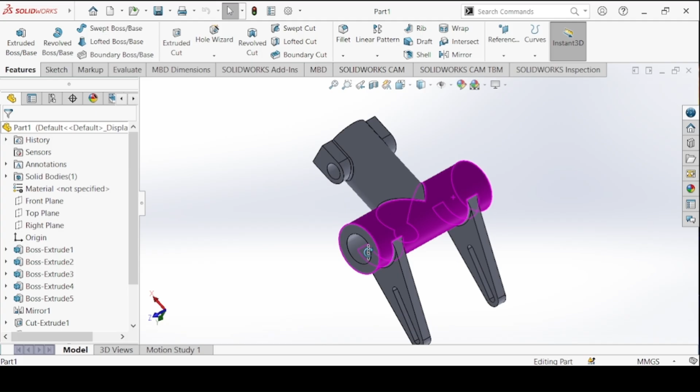With these dimensions on the top view, the front view, and the right side view, with all the dimensions in millimeters and the unspecified fillets having a radius of 2 millimeters. So this is a very easy part to model.

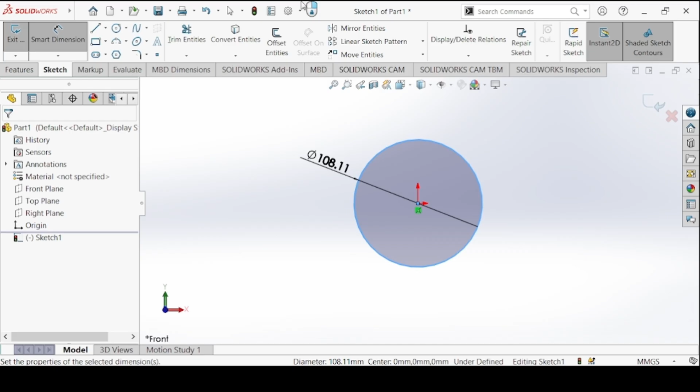Now extruded boss base, and then a length of 150. But looking at the part itself, you can see there is an absolute center here. So we want to make the extrusion via the mid plane. Okay.

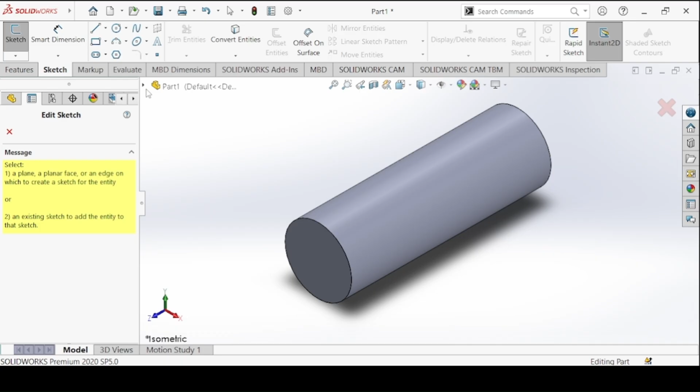We move on to this attached cylinder, and looking at the front view, the cylinder has a length of 100 millimeters starting from this middle, and the diameter of the cylinder is 50 millimeters. So create a sketch on the side view or the right plane. So the circle should be in the middle here, also having a diameter of 50.

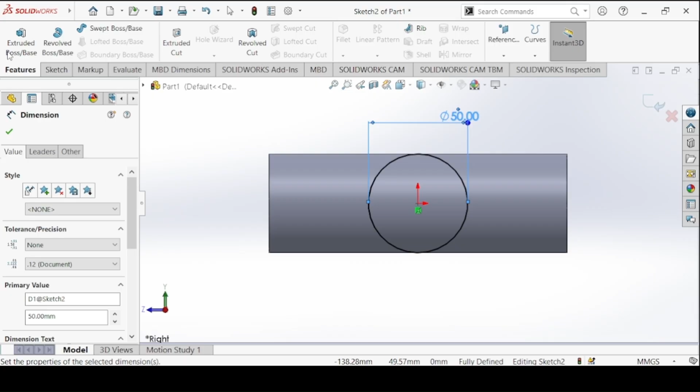And now extruded boss base should have a length of 100. Make sure you check this box for merge result to combine the two cylinders into one. Okay.

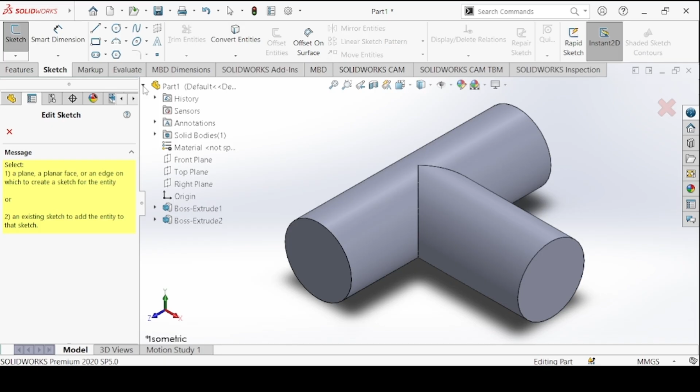Next, we add this material on the cylinder. We can see this is a semi-oblong feature. So create a sketch. Now, create a sketch in the middle and then extrude via the mid plane to both sides. So the sketch should be on the front plane, and then we use the straight slot feature to draw the oblong feature.

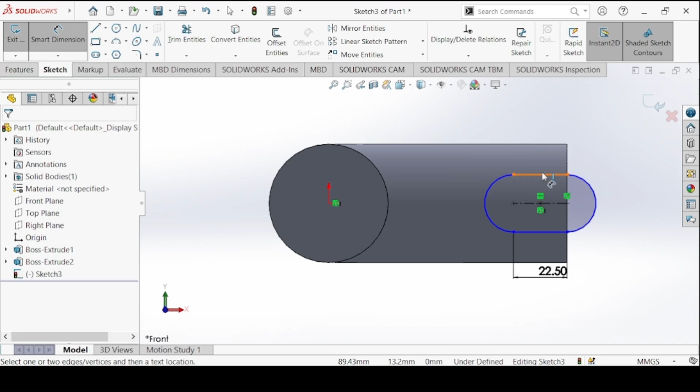Okay. Now let's dimension. So this length is 25. This is 22.5. We use a line to cut this shape because this will be the area that we extrude, and this will be it.

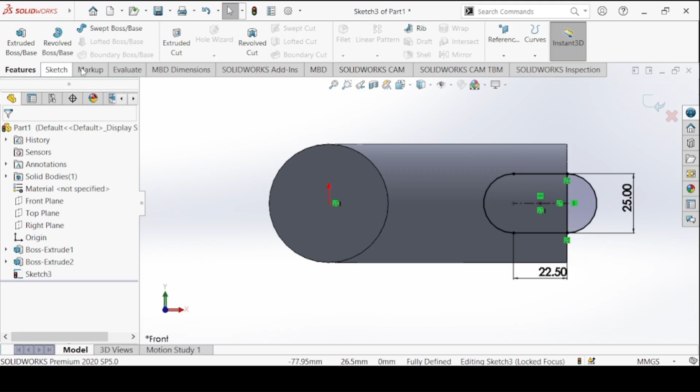So extruded boss base, and I'll click on this area, direction 1, mid plane, and then the length of extrusion is 70 millimeters. Merge results again to join the two blocks. Okay.

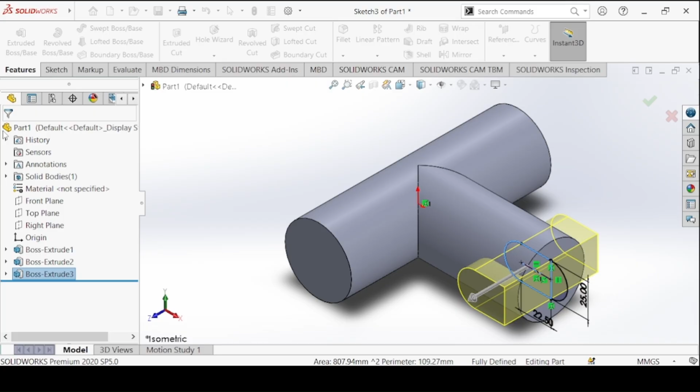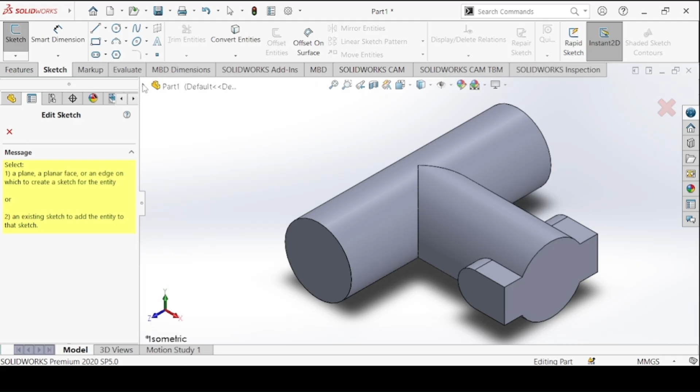Next off, we add the cylinder on top here. The cylinder has the sketch on the top plane, and the diameter of the circle is 20. And looking at this right view, the length of the cylinder is 35 from the middle here. Again, sketch this time on the top plane. In the middle here, a circle of diameter 20.

Extrude boss base and a height of 35. Merge results and okay.

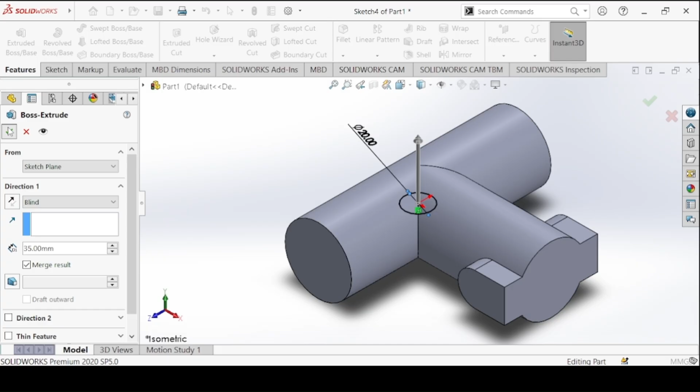The remaining material to add will be these two features. Looking here, we can see that they both have a thickness of 10 and they are both at a distance of 20 from these edges, so we can conclude that they are exact mirror images of each other. So we draw just one and then mirror onto the other side.

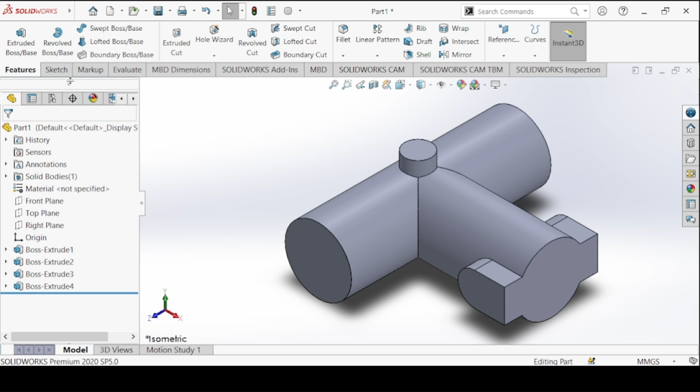So create a sketch on this face, and now let's draw one. So you have this center line inclined at an angle of 30 with an inclined length of 100. So draw that line for construction.

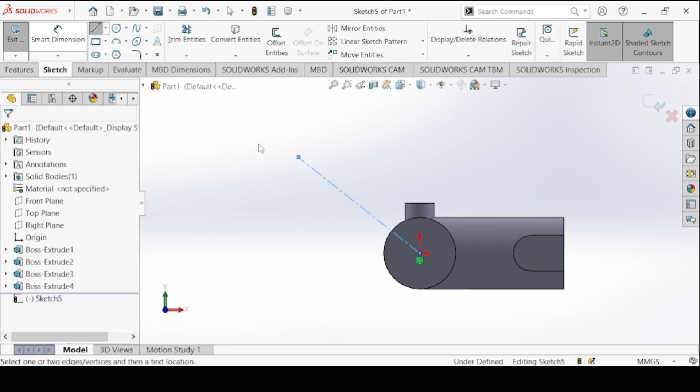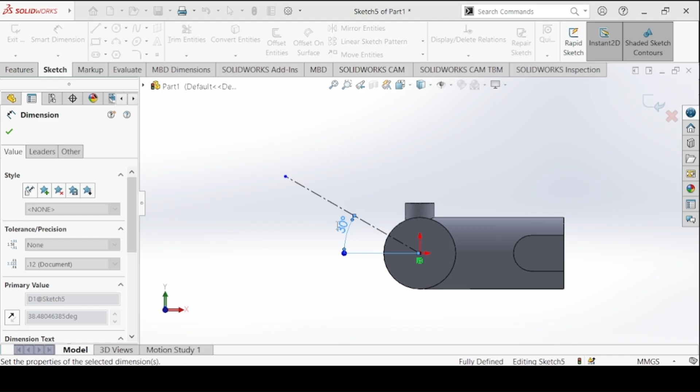Now let's dimension this line and then click on this origin again. You can see 4 cardinal points. Click on this arrow and the inclined angle is 30. Now the inclined length itself is 100.

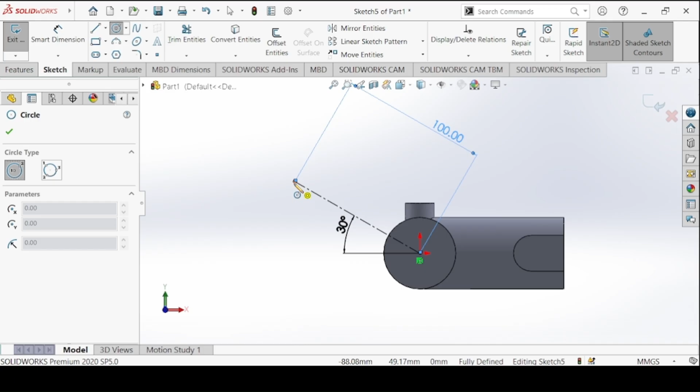And now over here we have an arc of radius 8. So instead we draw a circle of diameter 8 times 2. That will be the same thing.

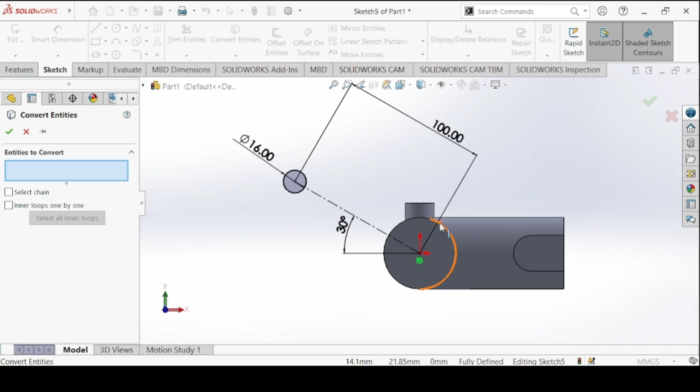And now we join the edges of this circle to the bigger circle over here. So first convert entities and then convert this circle into the sketch instead of drawing it manually, and then use the line to connect these two circles.

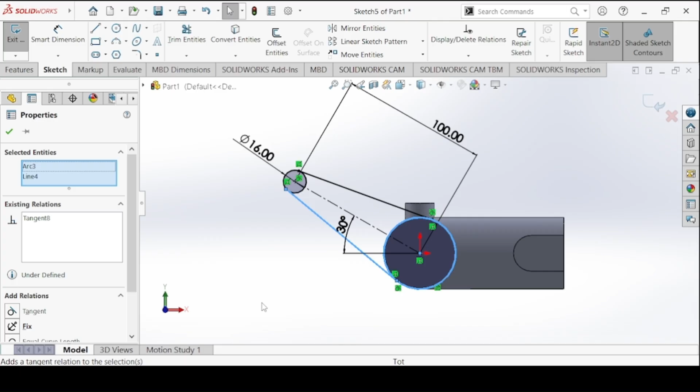Make sure that there are tangent relations where the line meets the circle. So you can see they are here, but over here it's not. So hold the shift key, click on the line and the circle and make tangent. Again, hold shift key, click on the line and the circle, make tangent.

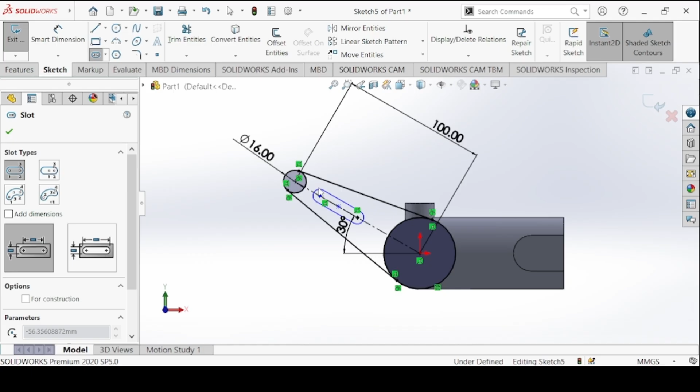Inside it we have an oblong feature of length 50 and radius of 3.5. So with a straight slot again, draw the oblong feature here, make the length, which is the inclined length, 50. And the radius itself 3.5.

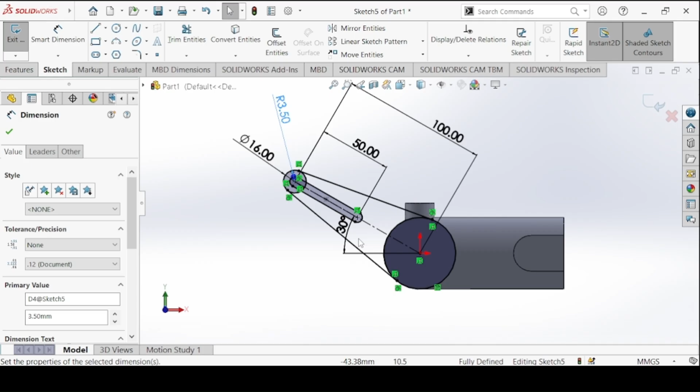Now we trim the unwanted edges so that this is all we have to extrude. So now extruded boss base, reverse for it to come.

I see the feature is offset by a distance of 20 from this edge, and the thickness is 10. So make the direction 10 millimeters, and then come to the from option here. Offset of 20 millimeters will do. Reverse for it to come inside, and this is what we want. Merge result and okay.

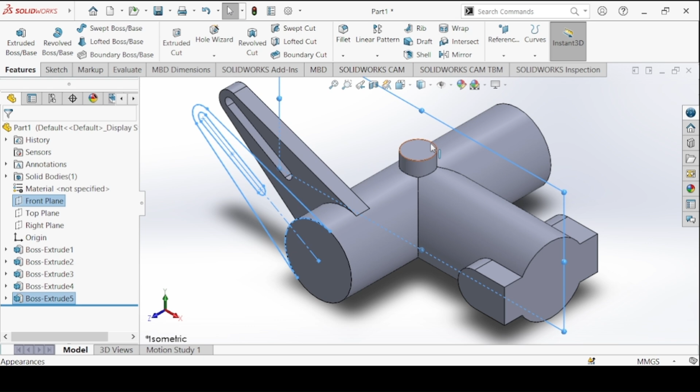The sketch is still selected. Hold the control key, and then we select the front plane, which will be the mirror plane. Click on mirror. Okay.

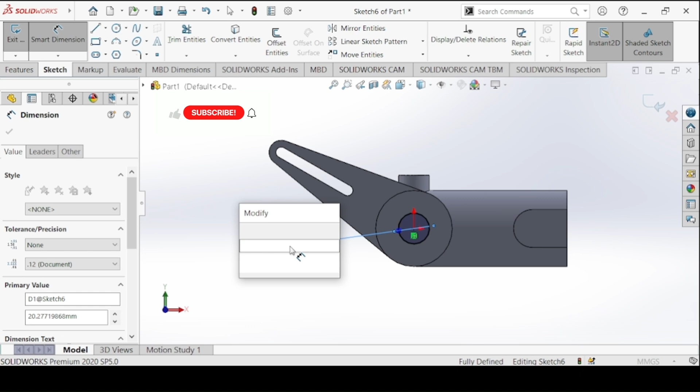We move on to create this hole. So a diameter of 30. Extrude cut on this face. I'll get a circle of diameter 30. Exit the sketch, and the length of the cut through all. Okay.

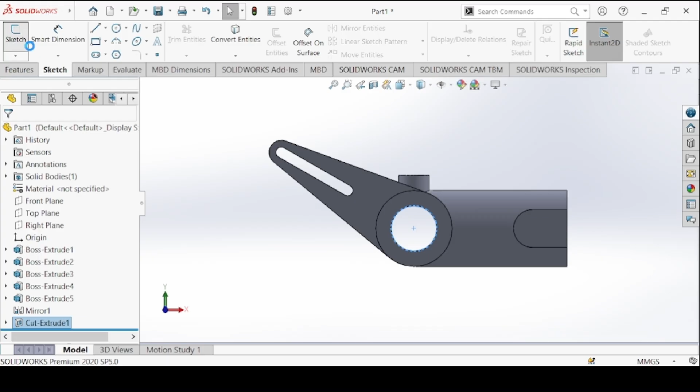Now a sketch on this face. This circle has a diameter of 16. Extruded cut, and then length of the cut through all. Okay.

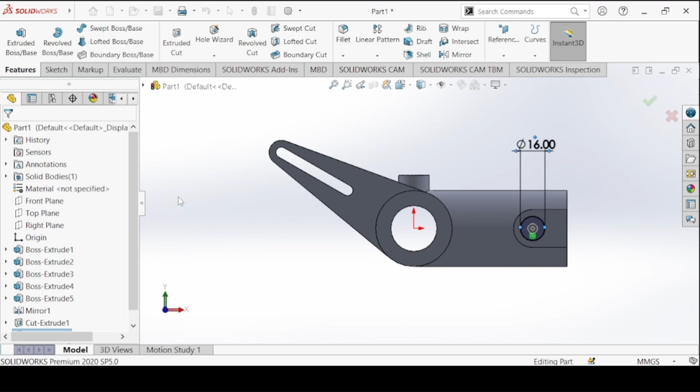There is another cut here, so extruded cut on this face, diameter of 10. Then set the end condition to up to next. Okay.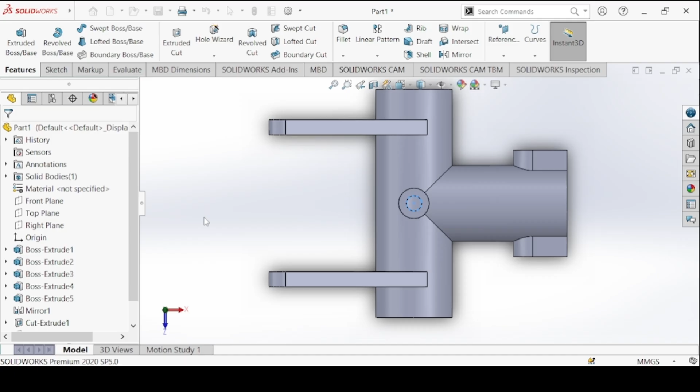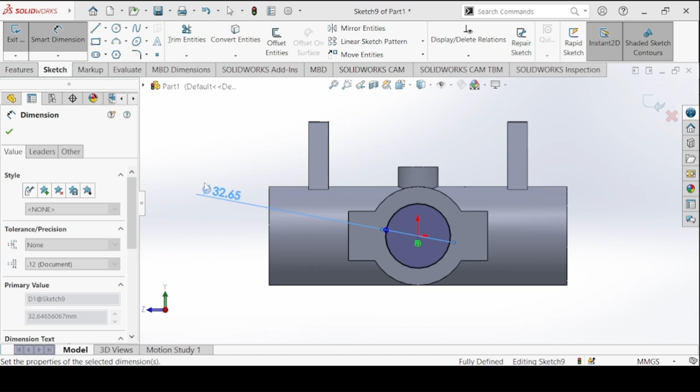Final hole will be on this face. Again, extruded cut, and then click on the face. Another circle, this time a diameter of 30. And then end condition of up to next. Okay.

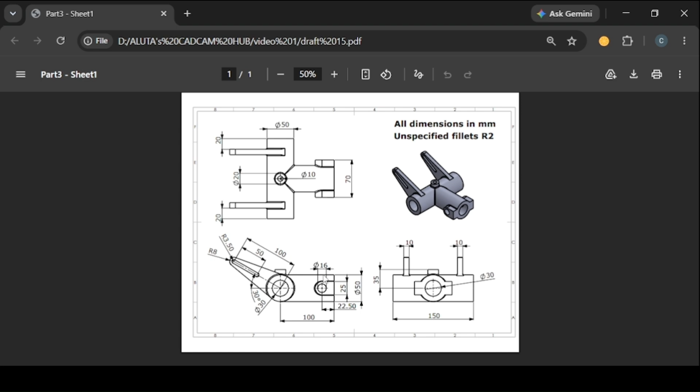The final thing is to add the unspecified fillet of radius 2 to all the edges that are supposed to have fillets. So click on the fillet feature, a constant size fillet, a symmetrical one of radius 2, and then click on all the edges that are supposed to get the fillet.

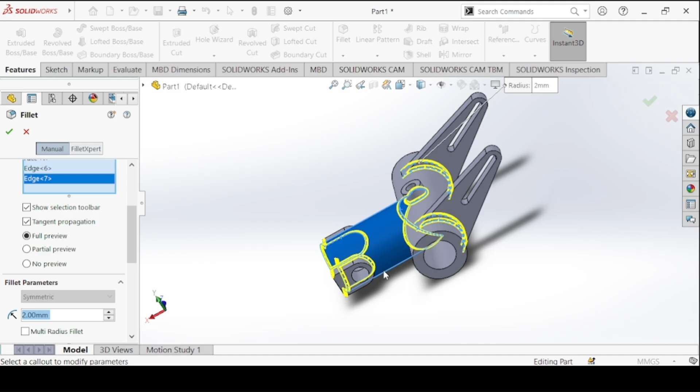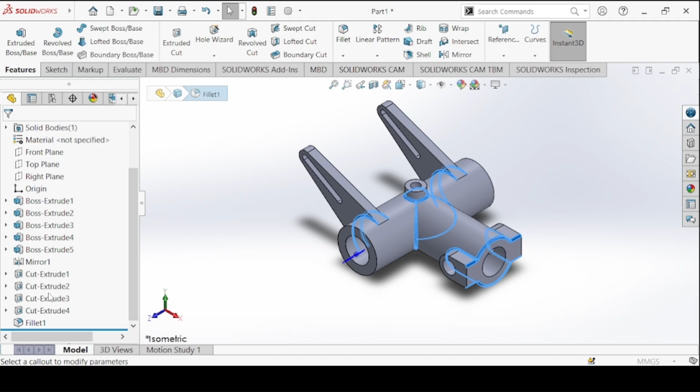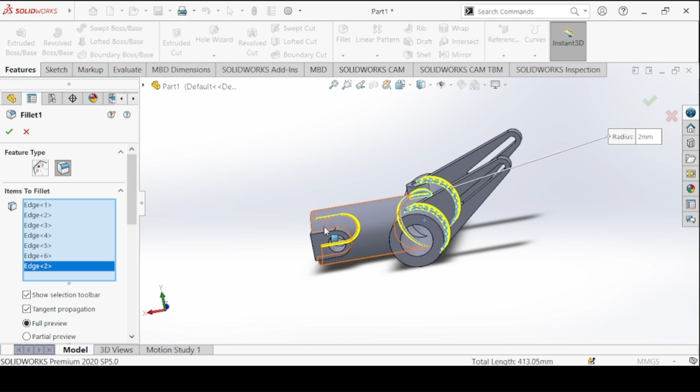Now rotate the part, and then click on the other edges. Okay. Okay, now edit feature. And there's no need to add these loops. Instead, the edges. Okay.

And finally, you can see that we have modeled this part with SolidWorks.